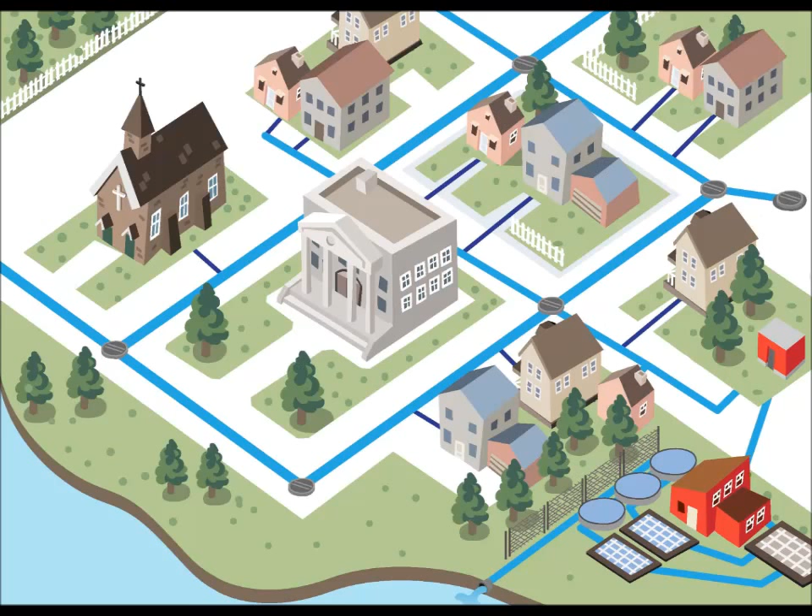If you're like most people, you aren't very familiar with how clean water comes into your home and how dirty water leaves. The Lewiston Auburn Water Pollution Control Authority, or LAWPCA, is a wastewater treatment plant for the cities of Lewiston and Auburn. Wastewater is collected from homes, schools, businesses, and industrial facilities and transported in a series of pipes, known as a collection system, to the wastewater treatment plant.

Additionally, septic haulers use trucks to carry waste from septic tanks in surrounding communities. At LAWPCA, harmful microorganisms and other kinds of pollution are removed from the wastewater so that it can be discharged safely into the Androscoggin River.

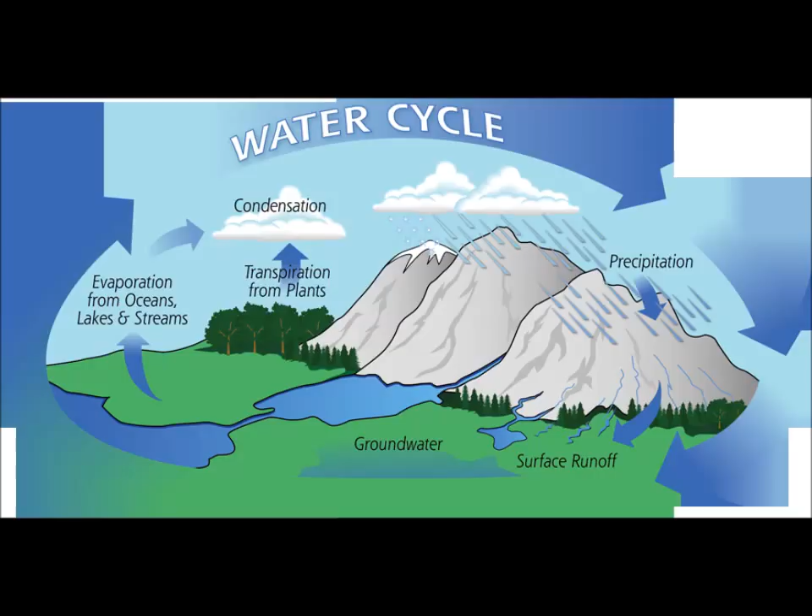Did you know that there is no such thing as new water? That's right. All of the water on Earth is the same water that has been here since the beginning of time. Earth's water is always in movement, and the natural water cycle describes the continuous movement of water on, above, and below the surface of the Earth. Water is always changing states between liquid, vapor, and ice.

The importance of how we care for and treat the water of planet Earth takes on a greater significance when we think of the saying, "We all live downstream." Another way of looking at it is the water that goes down your sewer pipe today is the water you will drink tomorrow. Of course, the water cycle is nature's way of cleaning used water over time so that it is good, clean, and drinkable.

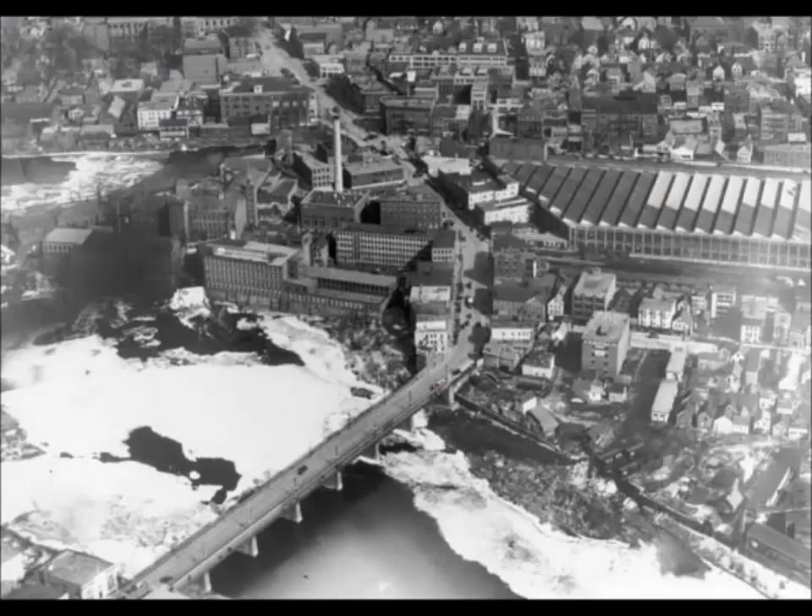How did it come to pass that the Androscoggin River was once one of the top 10 most polluted rivers in North America? The answer lies more in quantity than anything else. The waste from a few people is as natural to the river as is the waste from a bear or a deer. In small quantities, a large river such as the Androscoggin is well equipped to deal with waste through normal, natural processes such as aeration provided by waterfalls and rapids, settling of solids in deep pockets and pools, and biological removal through native bacteria, larvae, fish, and aquatic plants.

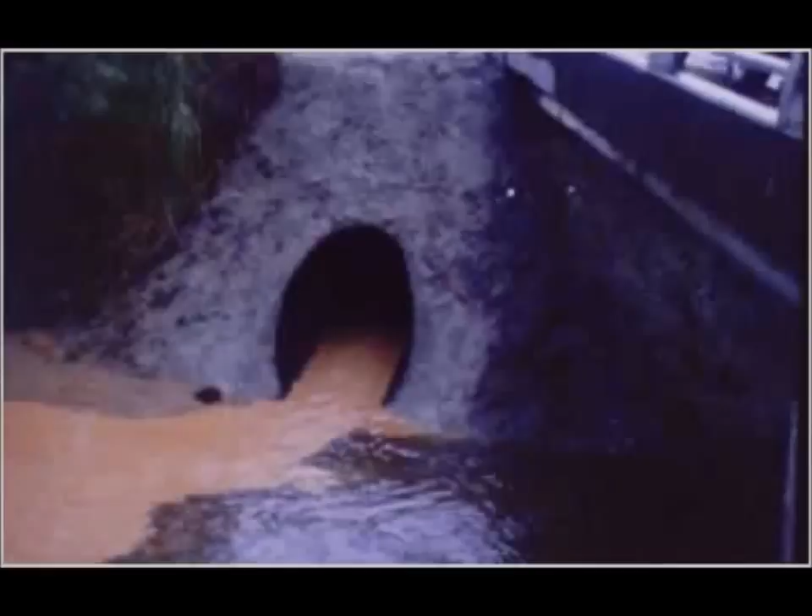The problems start when humans discharge too much waste from homes, mills, schools, and even runoff from parking lots. In short, the volume and strength of the waste generated from so many people living along the Androscoggin River got to the point where the natural processes used by nature became overwhelmed, and a polluted, foul-smelling river became the result.

Even before Maine's own Senator, Edmund Muskie, proposed the landmark legislation that became the Clean Water Act of 1972, Lewiston and Auburn came together to create LAWPCA. By building one wastewater treatment plant instead of two separate ones, the Twin Cities saved millions of dollars and embarked upon a cooperative approach to serving the people of Androscoggin County and cleaning up a truly magnificent river.

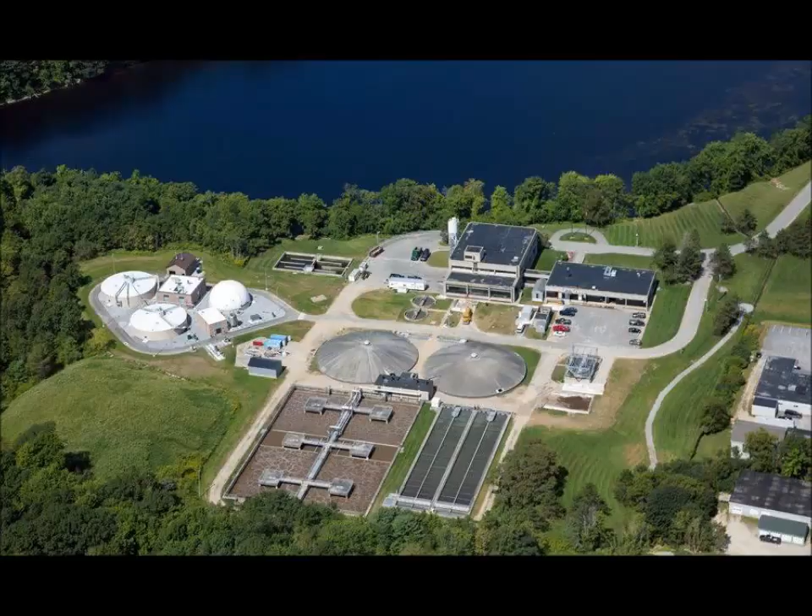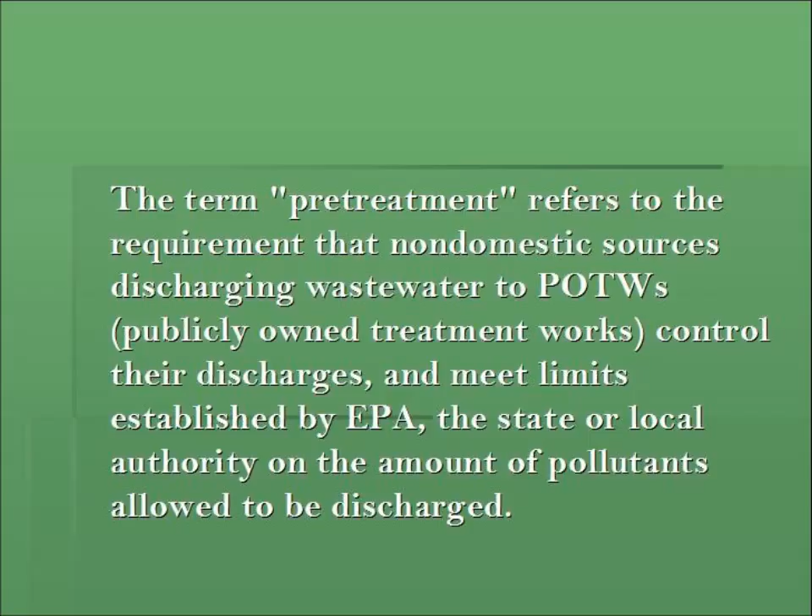Like most other city and town treatment plants that are funded by grants and loans established in the Clean Water Act, LAWPCA was mainly designed to treat domestic sewage only. However, the treatment plant also receives and treats wastewater from industrial, non-domestic users. As partners in the National Pretreatment Program, LAWPCA's responsibilities include finding and controlling discharges from all industrial users in Lewiston or Auburn that might cause problems in collection or treatment, or who are regulated by the federal government as categorical dischargers.

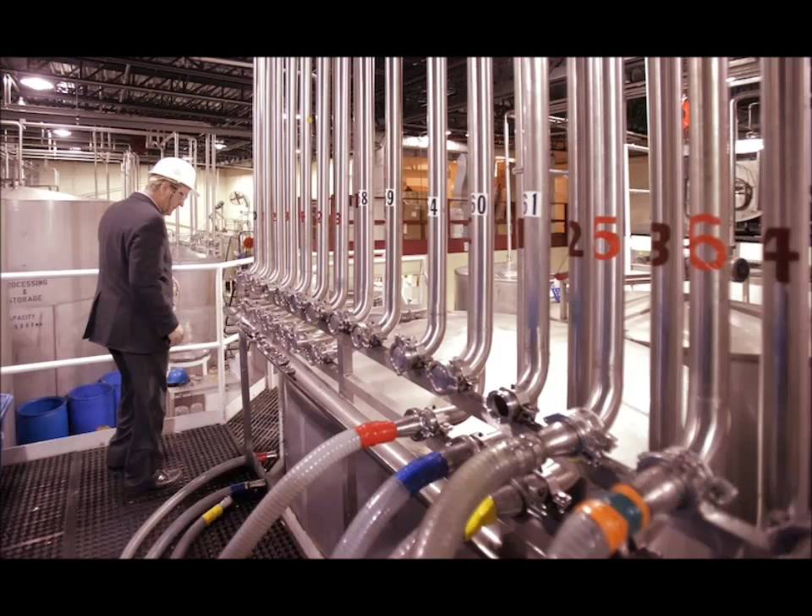To do this, a permit process was developed to assign rules, regulations, and local limits on all pollutants to protect our sewer workers, keep sewers from overflowing, protect the biological treatment processes, ensure the safety and quality of our compost and other biosolids, and help keep the Androscoggin River a safe place to fish and swim.

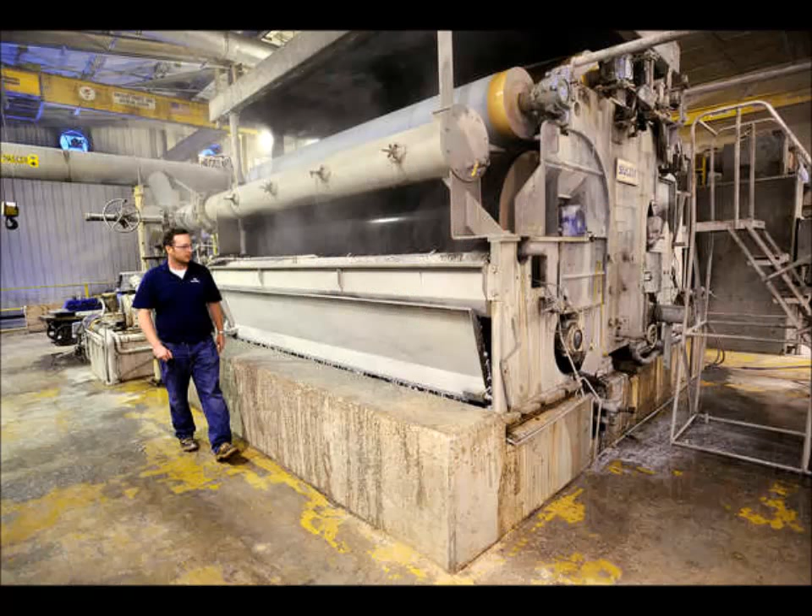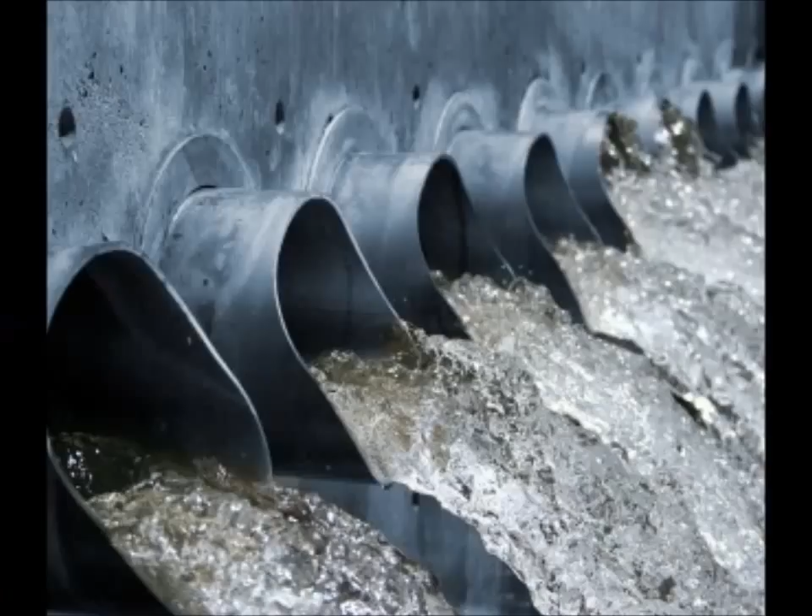Permitted industrial users are inspected annually and samples of their wastewater collected and tested to make sure they are following the discharge rules and complying with local limits and any federal categorical limits on pollutants. Industrial users with permits must also regularly sample their own wastewater to make sure they are meeting limits, and they must send reports on their compliance status to LAWPCA's pretreatment coordinator at least twice per year.

LAWPCA has been in operation since 1974 as a wastewater treatment plant. It services over 35,000 domestic users, 23 significant industrial users, and 26 surrounding communities from which septic and holding waste is received. The treatment plant is designed to handle an average flow of 14.2 million gallons per day, but by permit has to treat a maximum of 32 million gallons per day before bypassing.

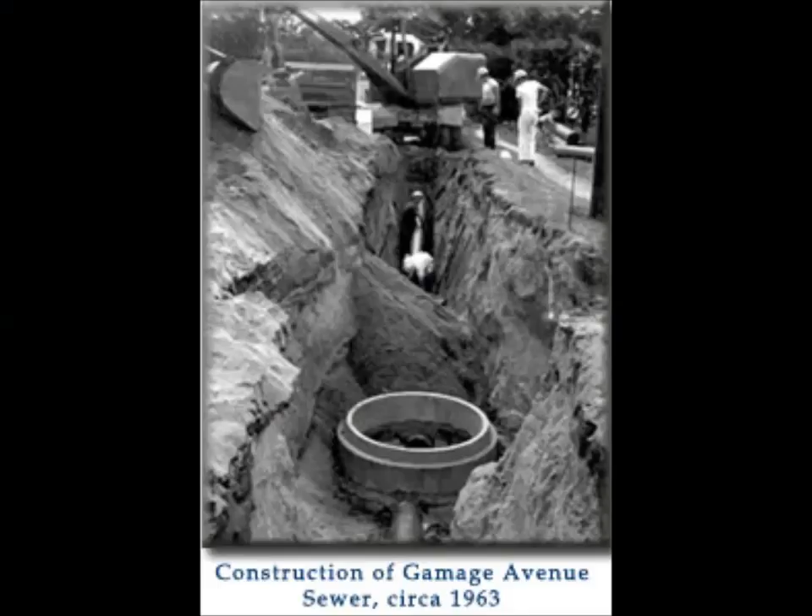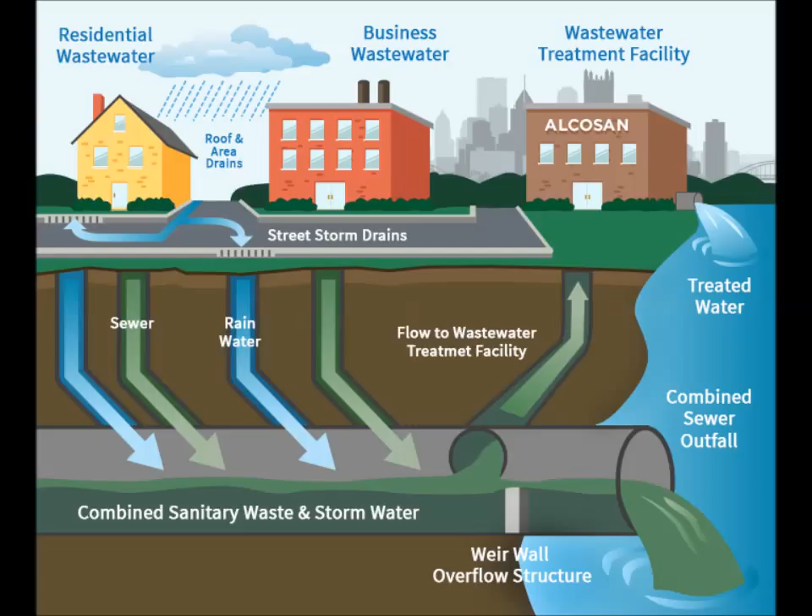Originally, the sewers in Lewiston and Auburn carried large quantities of stormwater to the treatment plant in combined sewers. After all, the pipes that had been placed beneath the two cities originally went straight to the river, and there was no need for separate sanitary sewers and stormwater sewers. Because the treatment plant can only process about 32 million gallons per day as a peak flow rate, diluted sewage has been bypassed to the river without treatment. These combined sewer overflows, or CSOs, have been greatly reduced as a result of the millions of dollars that have been spent by both cities to install new separate sewers.

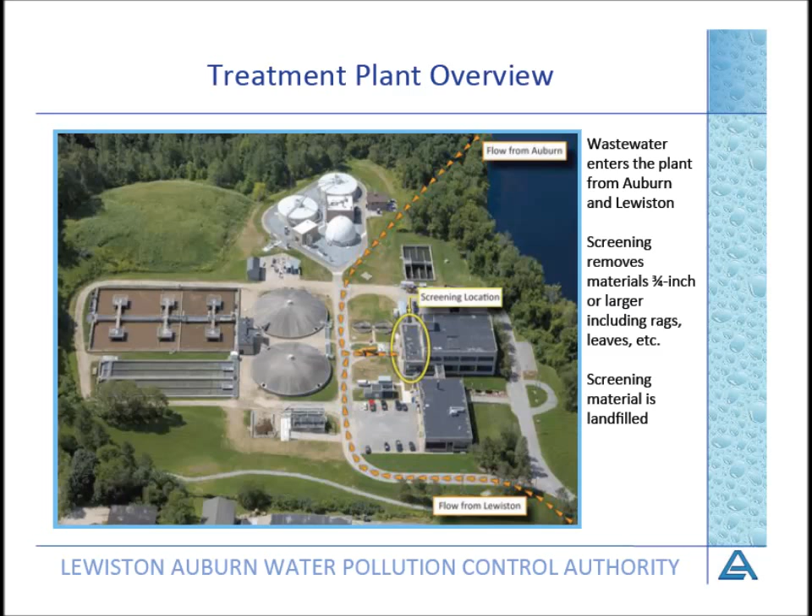Once wastewater arrives at LAWPCA, preliminary treatment involves the removal of large materials such as rocks, twigs, and various trash items. This material is removed by mechanical bar screens, washed, and then disposed of.

Baby wipes, rags, sanitary products, and other non-dispersible items frequently cause problems for pumps and screens. These problems are not only expensive to fix, but they can pose safety threats to the operators who must repair them. The only item that should ever be flushed is toilet paper. All other items should be disposed of in the trash.

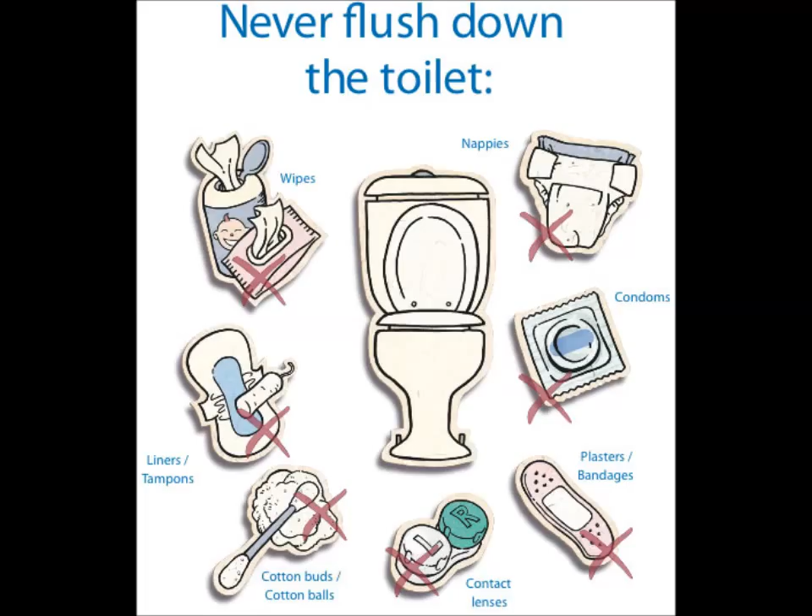After large debris is screened, the water moves on to grit removal. Here, sand and other heavy debris is removed and landfilled. Unfortunately, the grit cannot be reclaimed due to it containing dangerous trash items such as needles and razor blades.

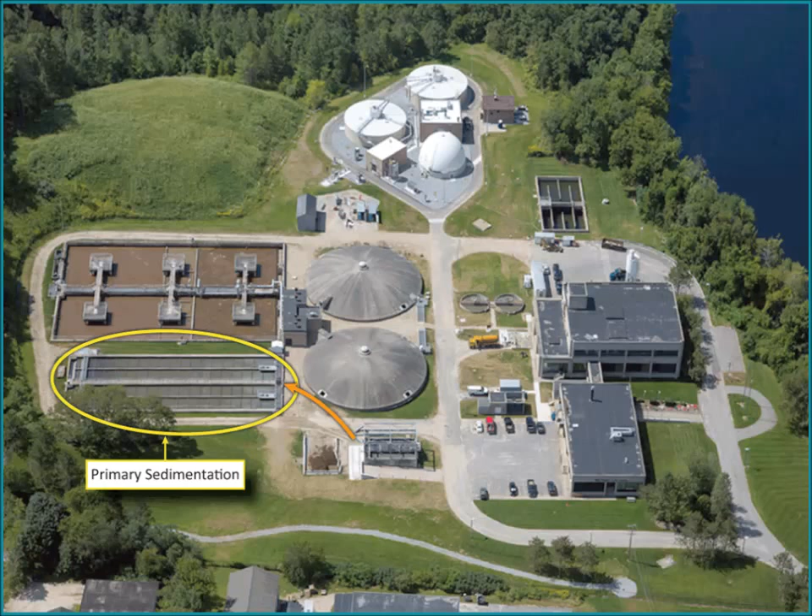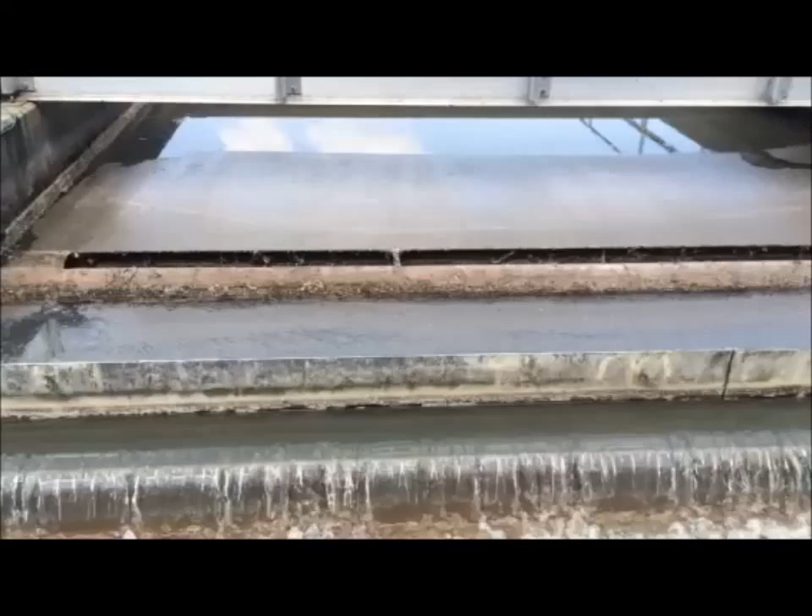After grit removal, the wastewater goes through primary treatment. Here, heavy solids settle to the bottom as primary sludge, and some fats, oils, and greases float to the top. The settled primary solids are pumped to the primary thickeners for later solids processing, and the floating fats, oils, and greases are skimmed off the top and transported to landfill.

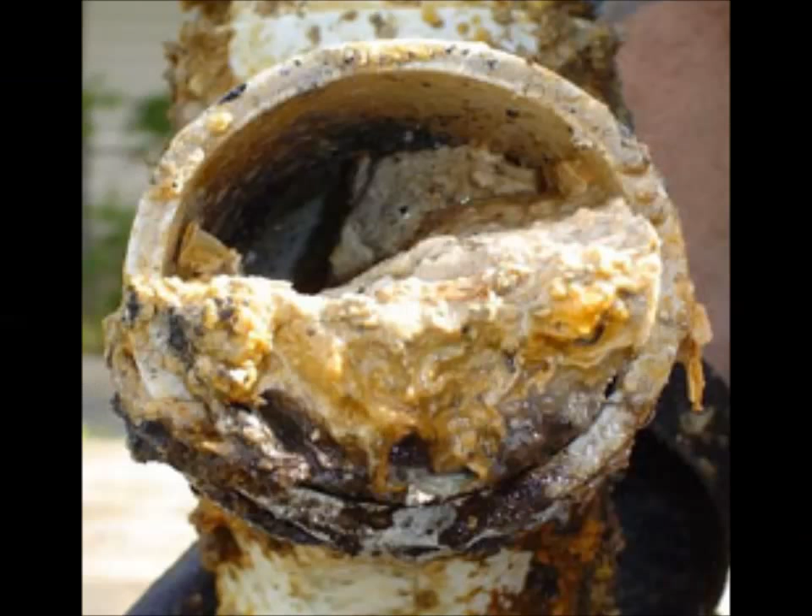Some grease from soaps and dishwashing is okay, but large amounts of heavy grease and oil can cause sewers to back up into houses or even back up on or under the street. You can be a great help by disposing of cooking grease in the trash instead of putting it down the drain.

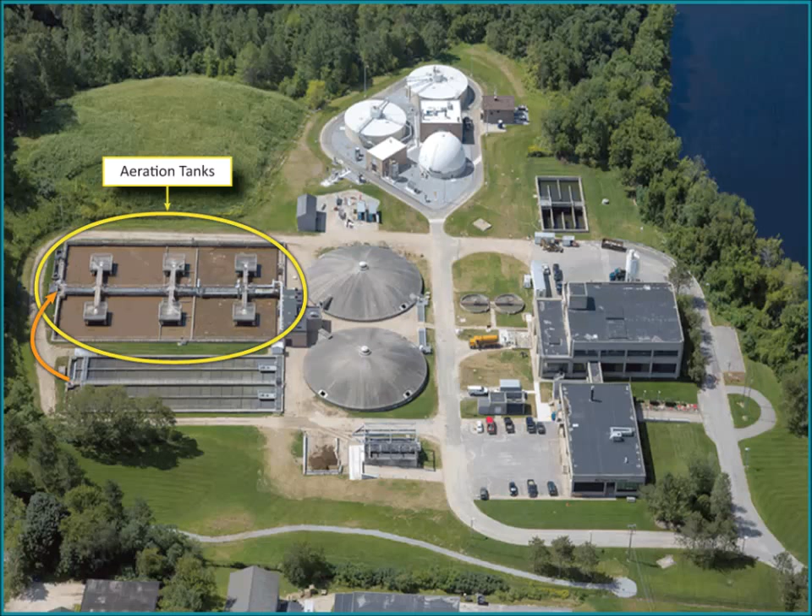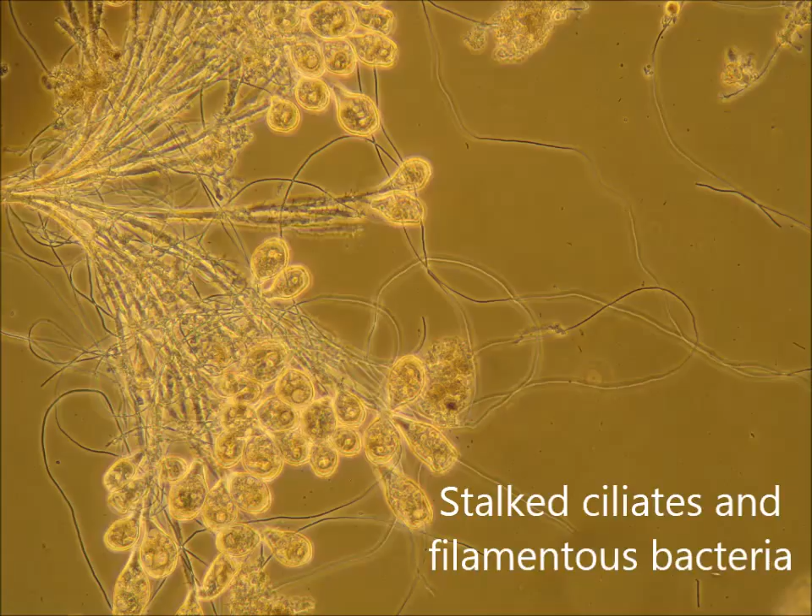Up to this point, the treatment process has been mainly physical separation. During secondary treatment, the water travels into the aeration basins to be treated biologically with naturally occurring bacteria and microorganisms that use the organic waste as a food source and break it down into carbon dioxide, water, and inorganic compounds.

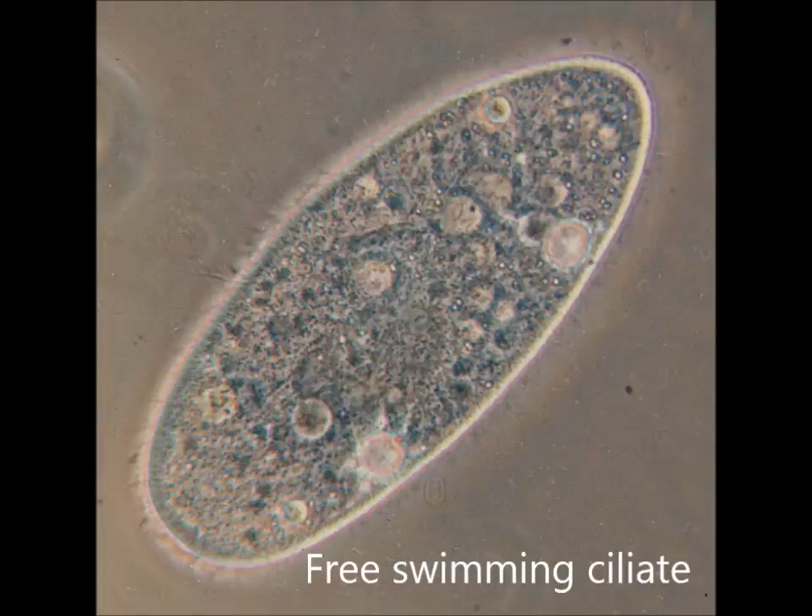The microorganisms reproduce and also die, so they are monitored and some are removed from the system to ensure there is always a healthy and thriving population to treat the waste. This solid waste product removed is called activated sludge.

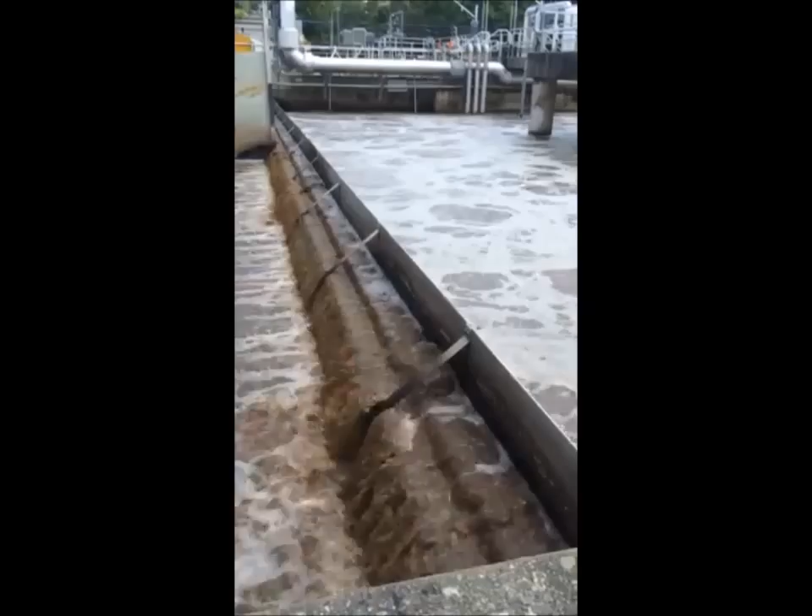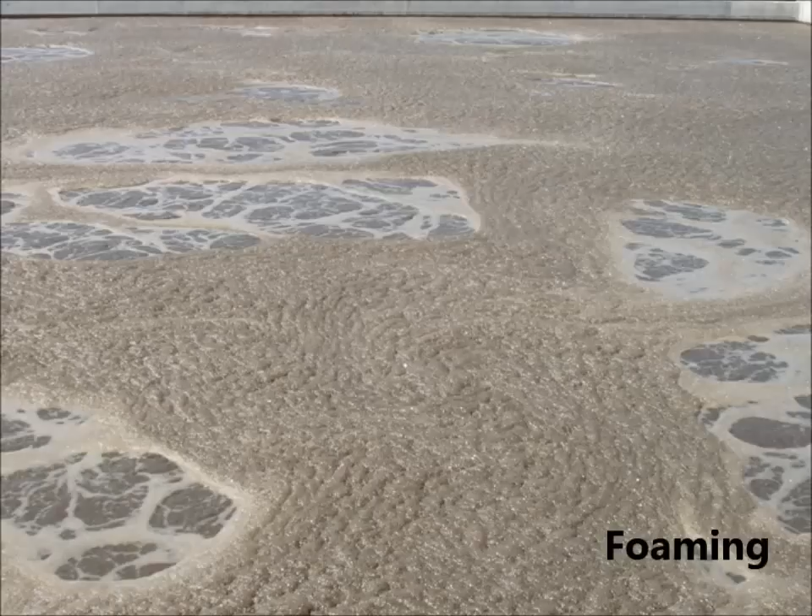In the aeration basin, desired bacteria are selected for by adding oxygen and by avoiding conditions that favor the growth of undesired organisms. These conditions include low nutrients, typically phosphorus, septic or low oxygen conditions, and an unbalanced food-to-mass ratio, with food being what is coming into the basins and mass being the amount of organisms present and ready to metabolize the food. The goal is to prevent too many undesired microorganisms from growing because they can negatively affect treatment.

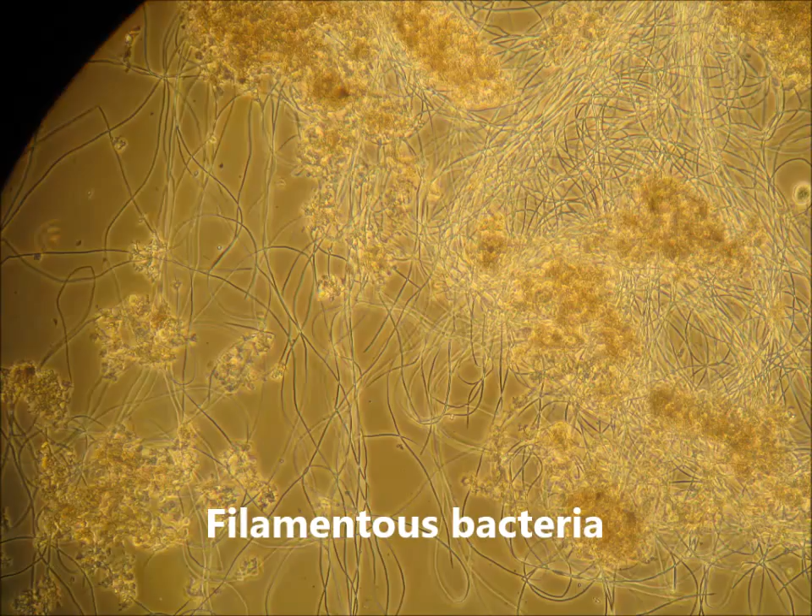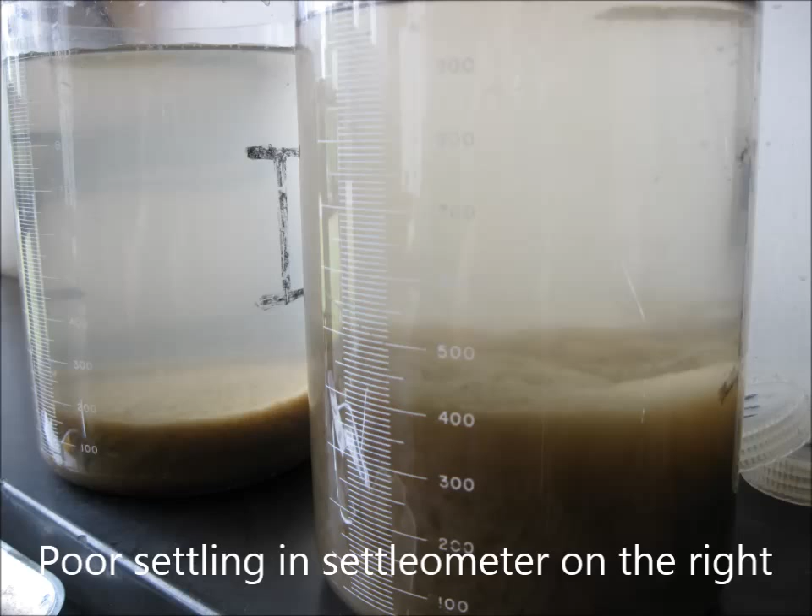For example, filamentous bacteria can cause significant problems during solid settling, which is the next step in the treatment process. In the secondary clarifiers, there is no aeration to keep the solids in suspension. In this still environment, the activated sludge separates from the water by settling to the bottom.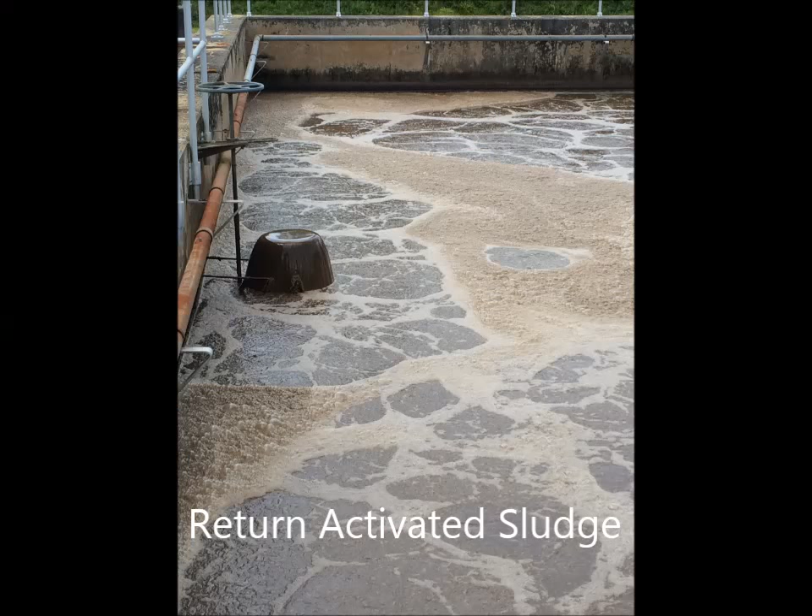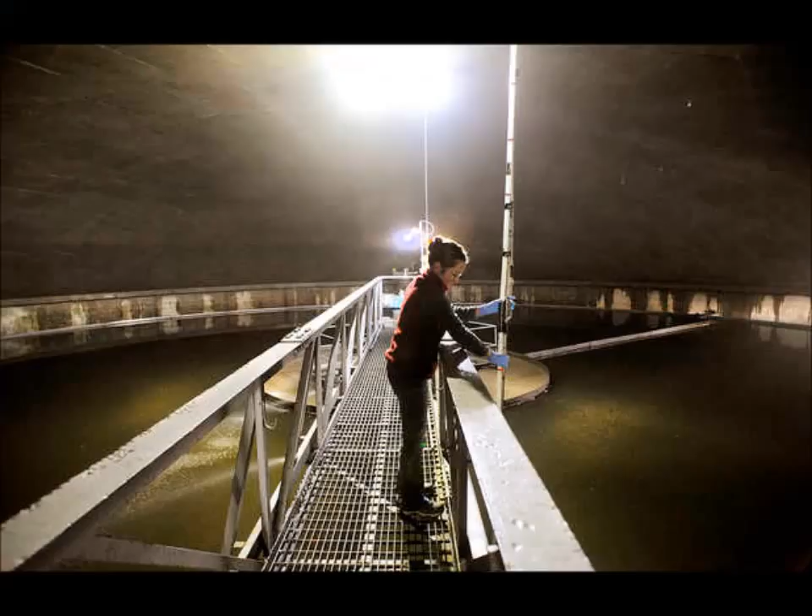Some of the activated sludge is removed and stored for later solids handling, but some is returned back to the aeration basin because the microorganisms are still viable and able to keep treating the incoming waste. During their time in the clarifiers, the microorganisms do not have any new food, so when they are returned to the aeration basin, they are essentially starving and very ready to keep metabolizing the incoming waste.

When the solids settle in the clarifier, the clean water above flows out over weirs and continues its journey to the river. At this point, the water is now called clarifier effluent, and it is much cleaner than when it came into the treatment process.

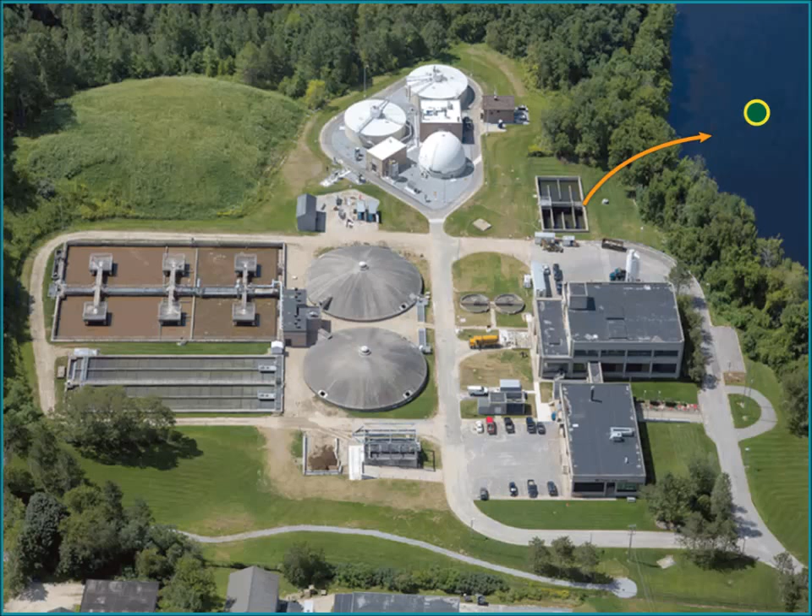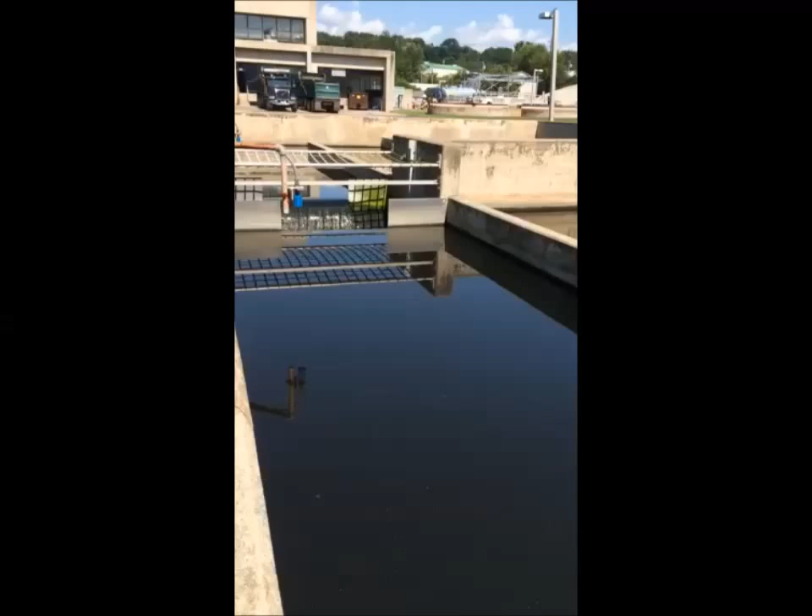The water has one more stop to make before it goes into the river. In the final basin, it undergoes disinfection from mid-May to the end of September. Disinfection is achieved by applying sodium hypochlorite, which is essentially a strong liquid bleach. Since bleach is toxic, the water is dechlorinated with sodium bisulfite before being discharged into the Androscoggin River.

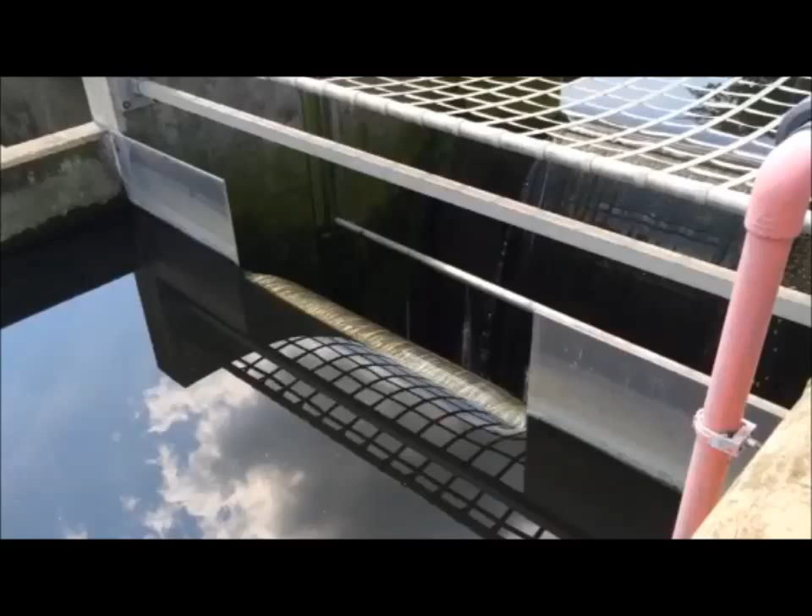The reason for seasonal chlorination is: one, biological activity slows down at colder temperatures, making any remaining microorganisms not as able to survive and reproduce. And two, there's much less recreational use of the river during colder months. People are not as likely to be boating or fishing.

The water, now called final effluent, leaves the treatment plant and enters the Androscoggin River. At minimum, 85% of the total suspended solids and oxygen demand have been removed. Now we'll visit the laboratory to learn about the testing done at LAPCA.

The laboratory staff is responsible for conducting many tests to ensure LAPCA is providing quality treatment. The final effluent being discharged to the river must meet compliance standards. The Maine Department of Environmental Protection sets limits for certain parameters and assigns those limits as part of a Maine Pollutant Discharge Elimination System, or MEPDES permit. Let's take a look at some of the testing done in the lab.

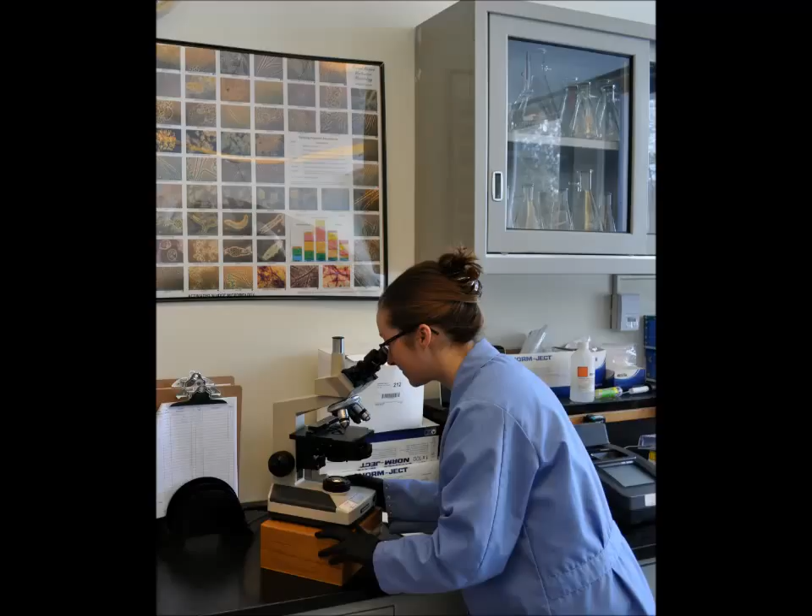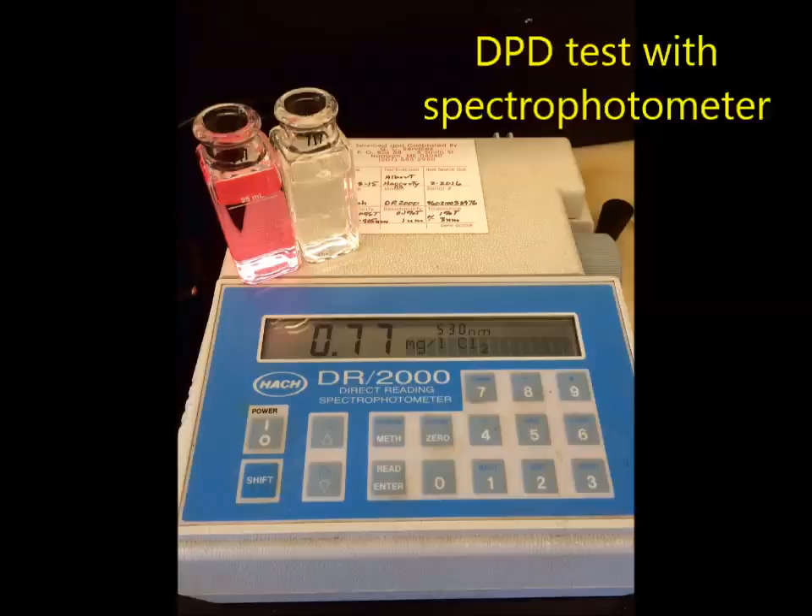Total residual chlorine testing is done to ensure that enough chlorine is being applied to achieve adequate disinfection, and also to confirm that proper dechlorination is happening and high levels of chlorine are not being discharged into the river. The typical chlorine level for disinfection might be 1 milligram per liter in the final basin, but the permit limit for what can be discharged is 0.24 milligrams per liter.

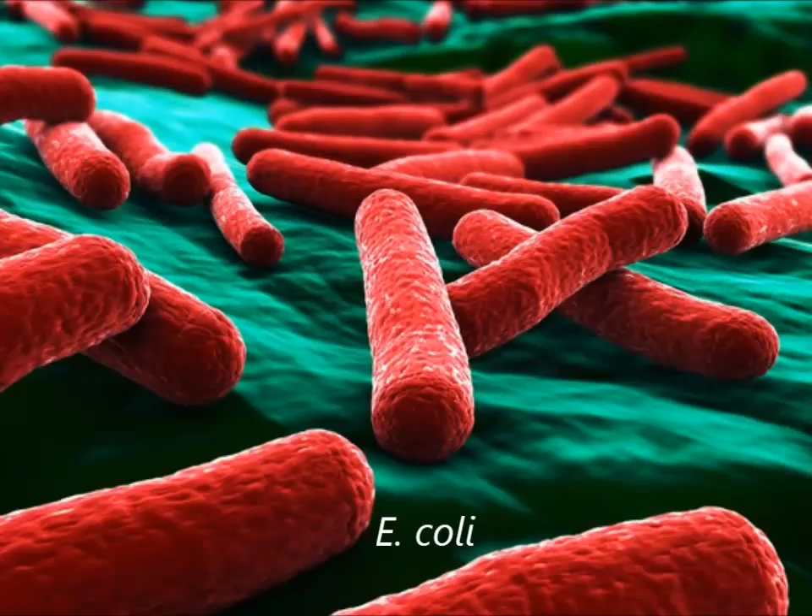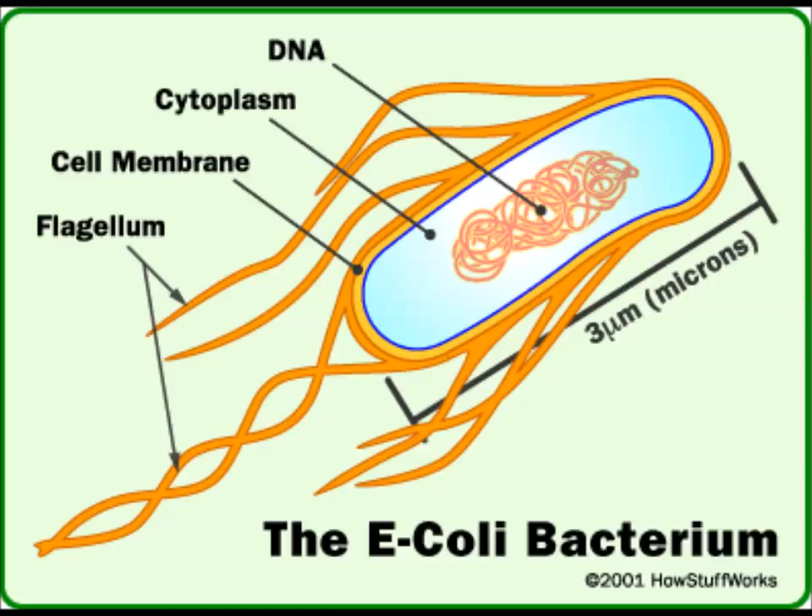E. coli is a member of the fecal coliform group of bacteria, meaning that it is found in the intestinal tracts of warm-blooded animals. While many strains are generally harmless, they do live under the same conditions that human pathogens live. Since it is not practical to test for every possible pathogen, E. coli is used because it is an easily detectable indicator organism.

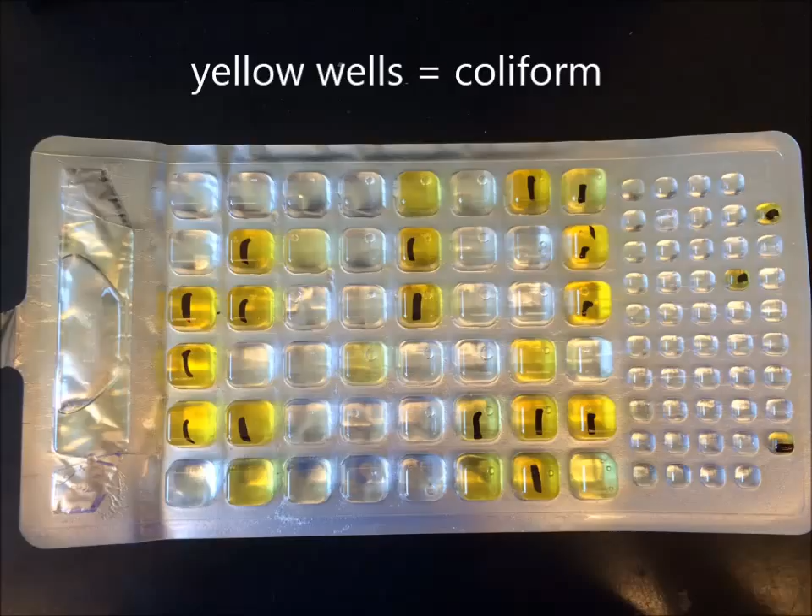E. coli has been shown to be a better predictor of the potential for impacts to human health from exposure to wastewater effluent and surface waters which contain wastewater effluent. The assumption is that if the indicator organism is killed, other possible pathogens have also been killed during effluent disinfection. LAWPCA's E. coli permit limit is 949 colony-forming units, or CFUs, per 100 milliliters of effluent, but the concentration being discharged is typically much lower than that.

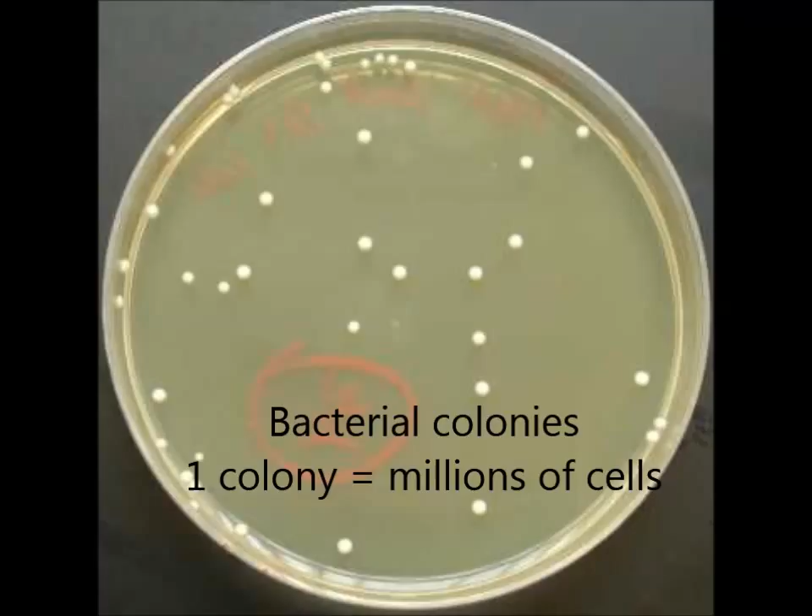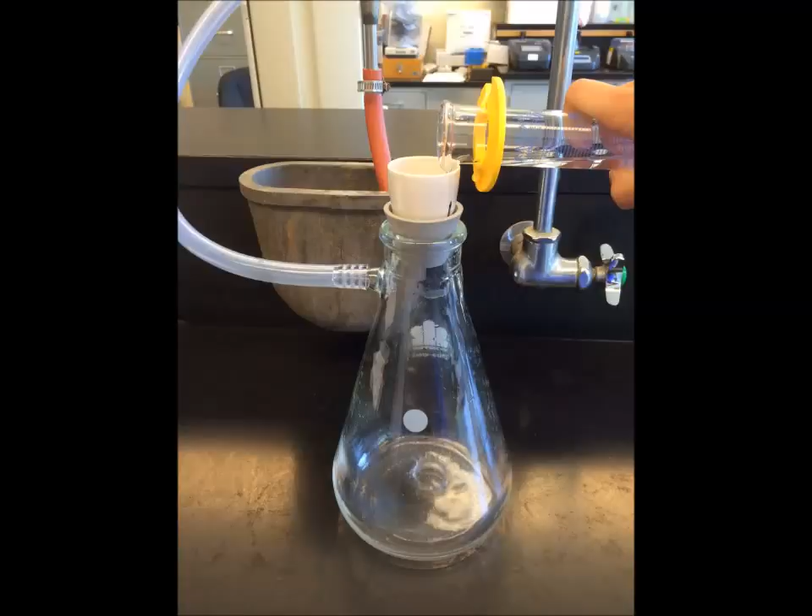Another important test is called total suspended solids, or TSS, which is a measure of the non-filterable solids in water. Water is passed through a filter, then the amount trapped is weighed and a solids concentration is calculated. TSS can include a wide variety of material, such as dirt, decaying plant and animal matter, industrial wastes, and sewage. High concentrations of suspended solids can cause many problems for river health and aquatic life, so reducing them as much as possible is very important.

From the time wastewater enters the treatment plant to the time it leaves, the level of solids must have been reduced by at least 85%. The numerical permit limit is 50 milligrams per liter daily maximum. The solids entering from Lewiston and Auburn can average 200 to 500 milligrams per liter. This is reduced to roughly 100 to 150 milligrams per liter after primary treatment, and typically less than 20 milligrams per liter will be discharged into the river. These values can change during atypical situations, such as a major rain event, when the treatment plant can become hydraulically overloaded.

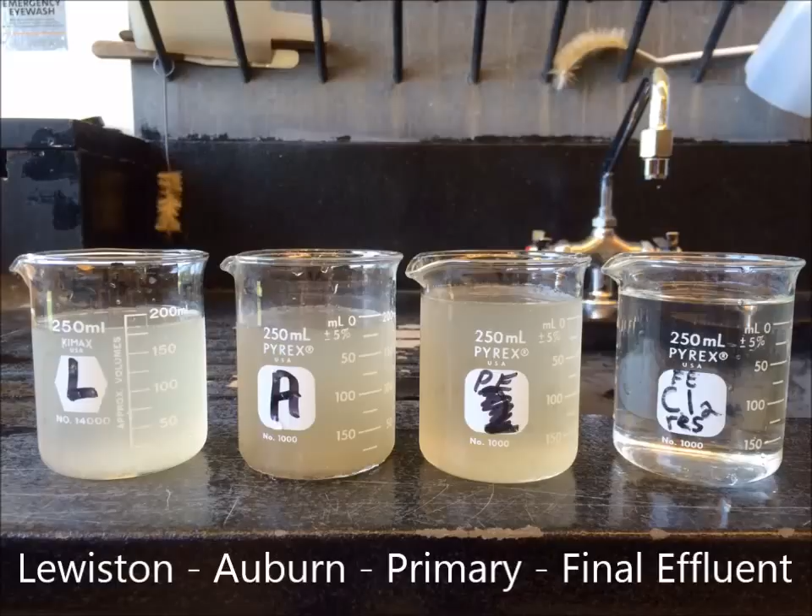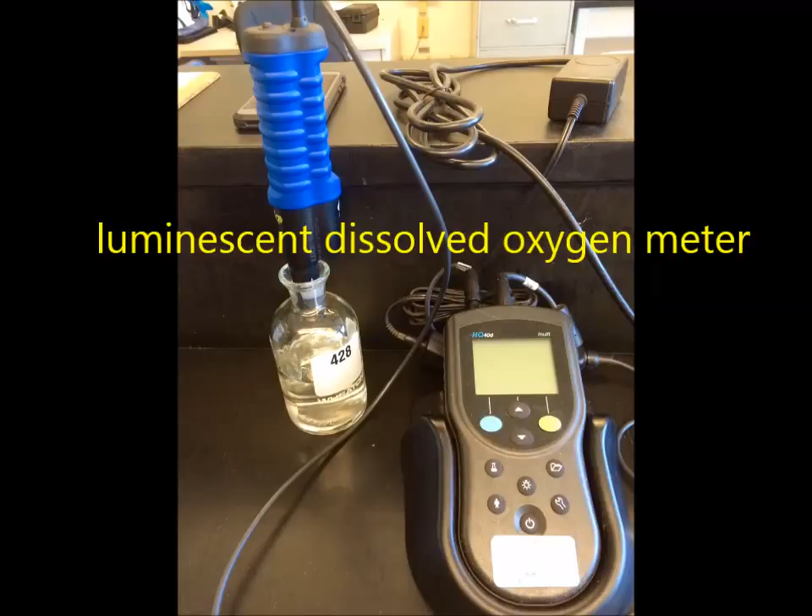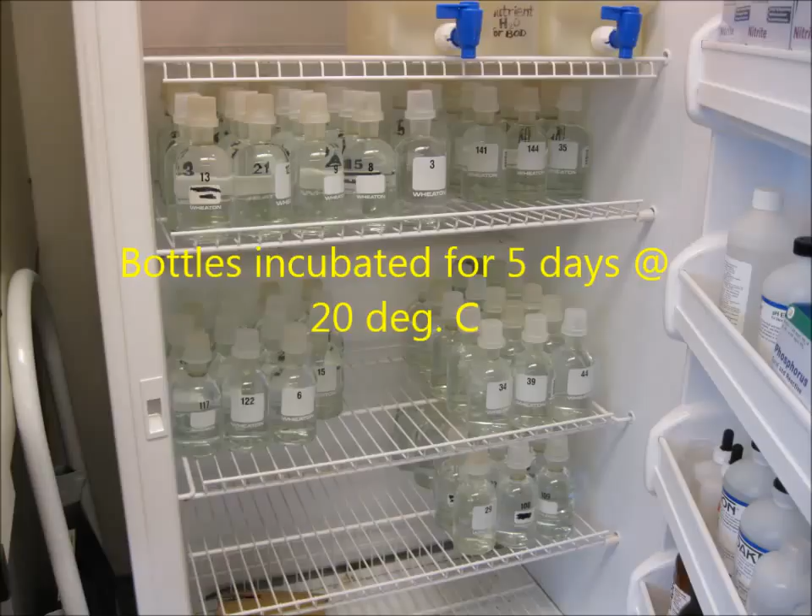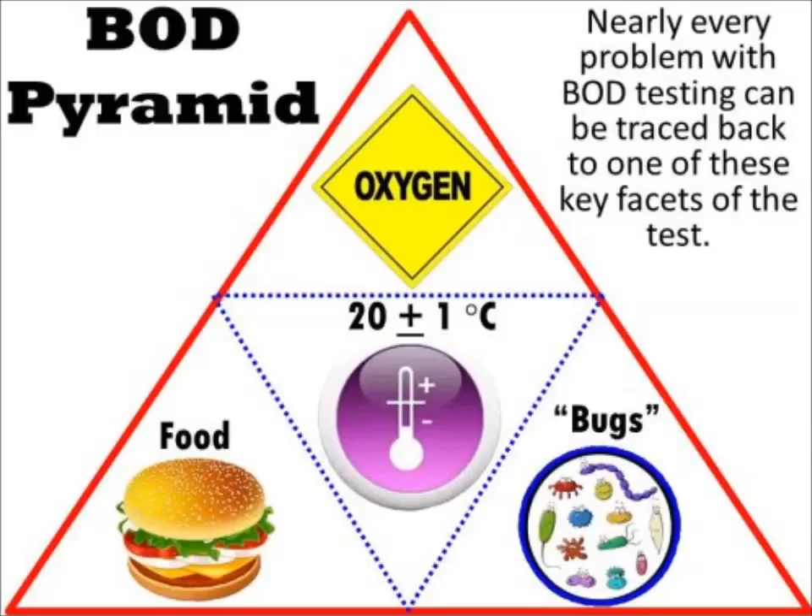Biochemical oxygen demand, or BOD, is the measure of the amount of dissolved oxygen that must be present in water in order for microorganisms to decompose the organic matter present in the water. It can be used as a measure of the degree of pollution in wastewater because the higher the oxygen demand, the greater impact the effluent might have on the receiving water. Similar to total suspended solids, the oxygen demand must be reduced by a minimum of 85% from the time the water enters the treatment plant to the time it is discharged to the river. The numerical permit limit for this is also 50 milligrams per liter daily maximum, though LAWPCA routinely discharges 20 milligrams per liter or less of oxygen demand to the river.

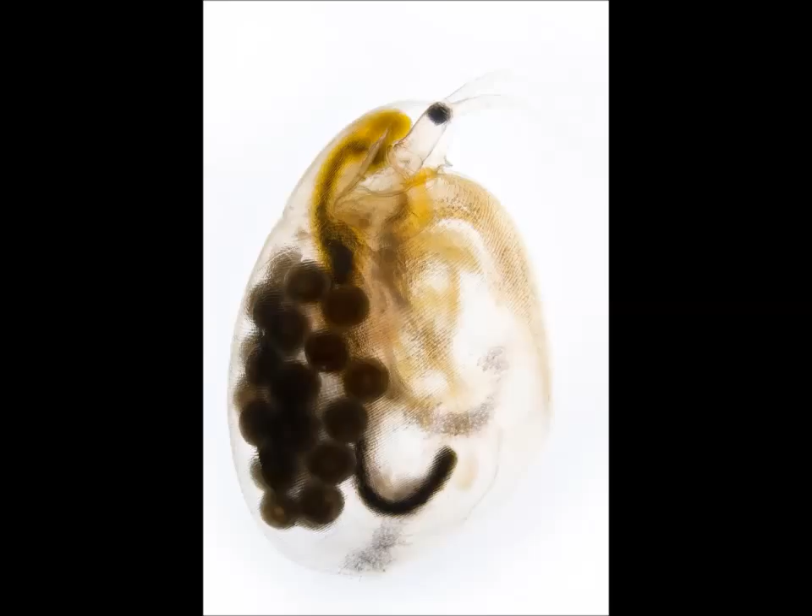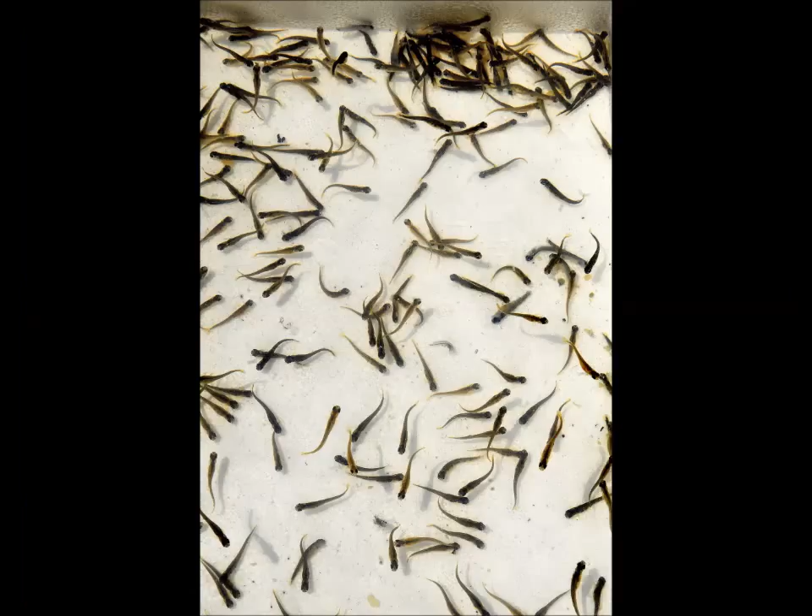The test that truly shows how clean the final effluent is called the whole effluent toxicity test. In this test, various concentrations of effluent in river water are used to determine the acute and chronic effects on living organisms. The survivability and reproducibility of water fleas and the survivability and weight gain of fathead minnows is analyzed. Results have actually shown that the organisms can fare better in 100% effluent than in 100% river water, indicating that the water being discharged from LAWPCA is actually cleaner than the water existing in the river.

The lab also does daily process control testing to monitor the water treatment. These tests are not required, but they help make sure everything is operating properly and signal when adjustments need to be made.

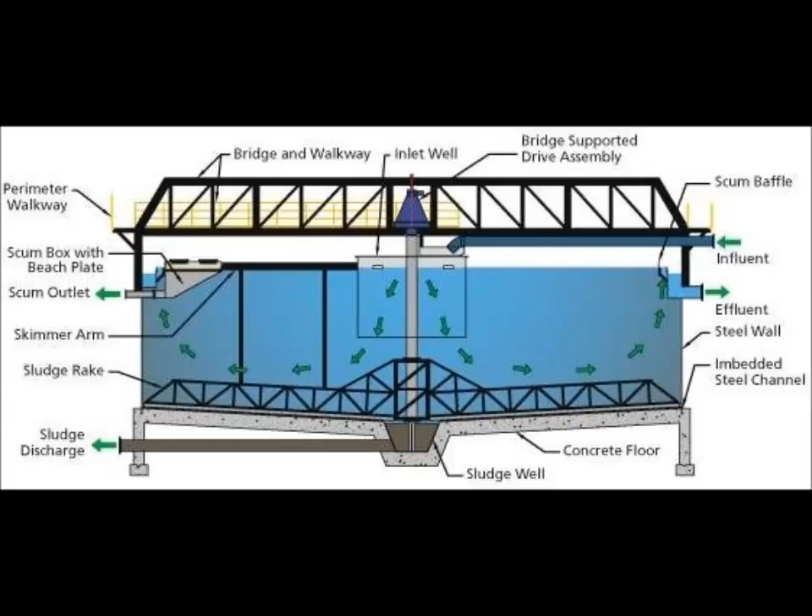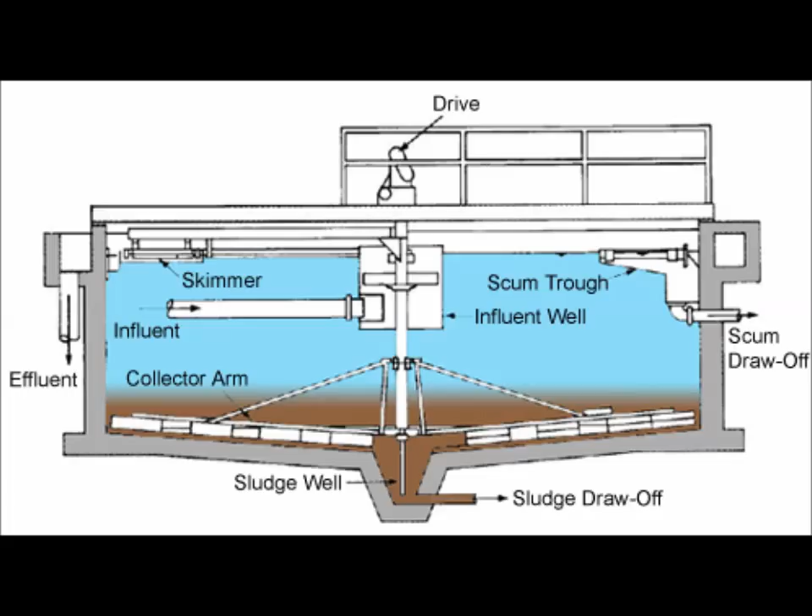Now that you know where the water goes, we have to go back and review how the solids are treated. If you remember, there is primary sludge that settles out in the primary clarifiers and activated sludge that settles out in the secondary clarifiers. Primary gravity thickeners allow primary sludge to settle and compact. The thickened sludge is withdrawn from the bottom of the tank and is fed to the anaerobic digesters. The water flows over weirs and is returned to the beginning of the treatment plant just before the bar screens.

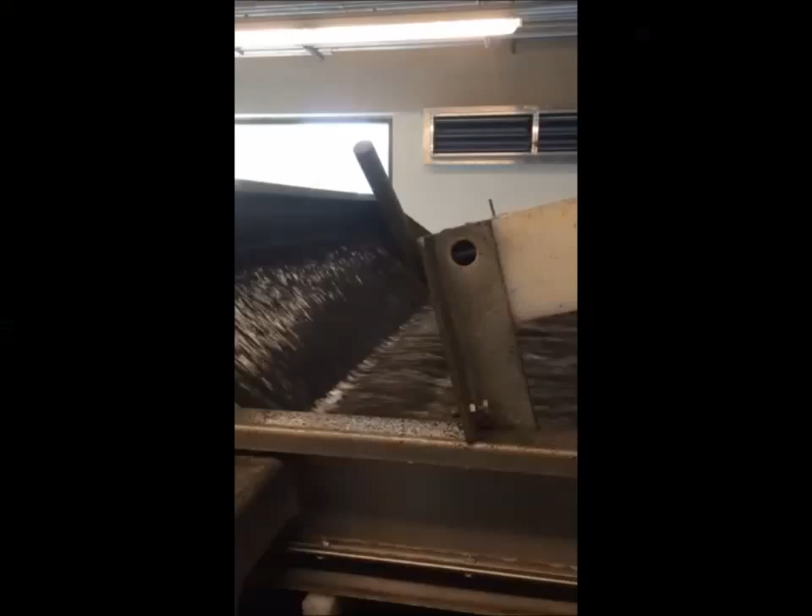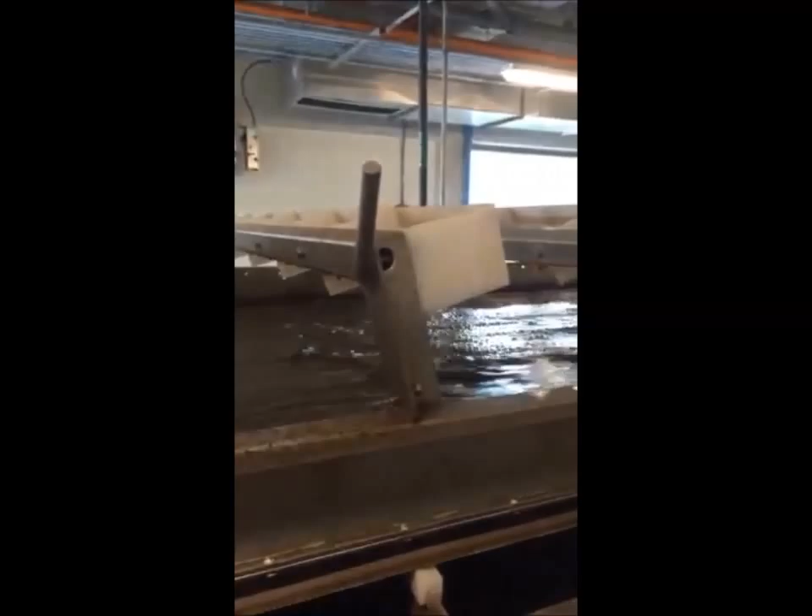Gravity belt thickeners, or GBTs, are machines that are used to pre-thicken activated sludge, or remove water content, before introducing the sludge into the anaerobic digesters. The goal is to remove as much water as possible so that more degradable solids can be fed to the digesters. The process consists of mixing polymer into the activated sludge stream, thus allowing sludge to clump together and release water. The released water is drained through the belt of the machine and sent back to the beginning of the treatment plant. The now thickened sludge is transferred via progressive cavity pumps into holding tanks. It is from these storage tanks that the sludge is transferred into the digester. At the end of 2012, LAWPCA became the first wastewater treatment facility in the state of Maine to construct anaerobic digesters.

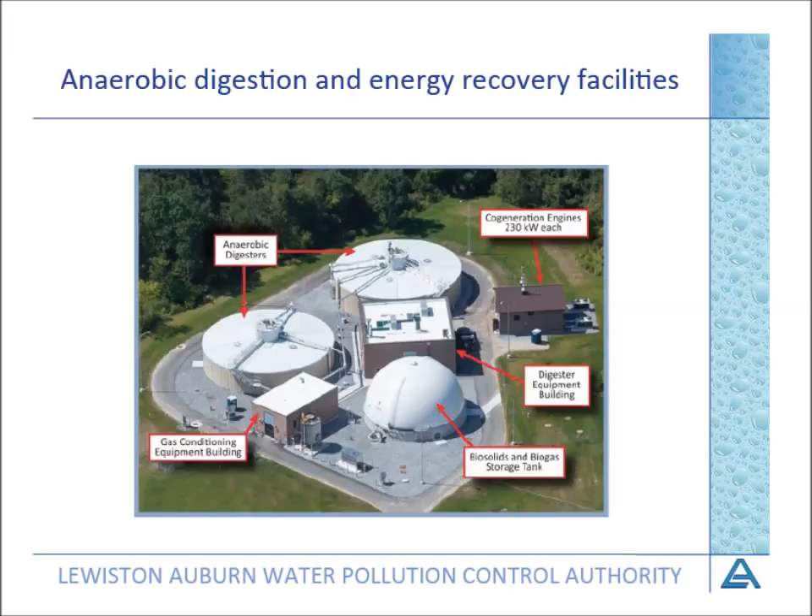This extra step in the treatment process was chosen because, one, it reduces the amount of solids that need to be dewatered and land applied or composted, and two, it creates a methane-rich biogas which can be converted to energy, providing significant financial savings. The digesters have a combined capacity of 1.38 million gallons. They are mesophilic, which means they are maintained at approximately 97 degrees Fahrenheit.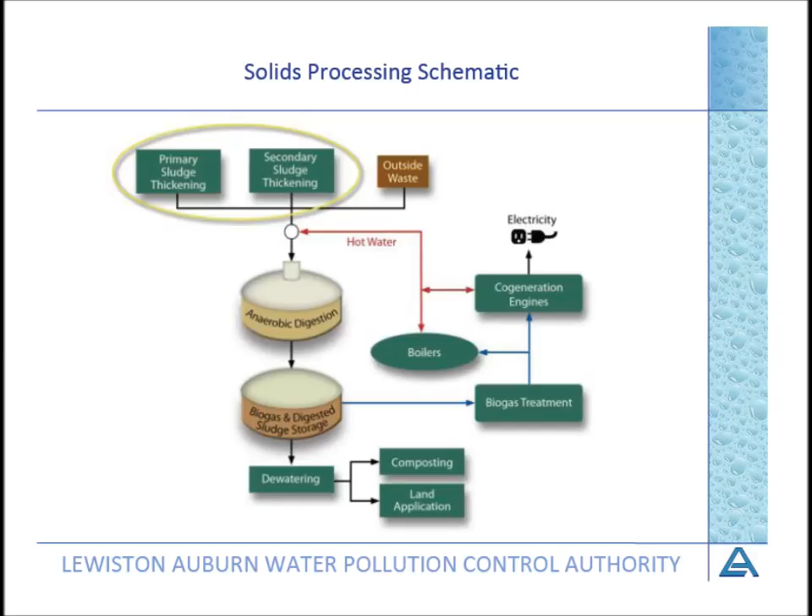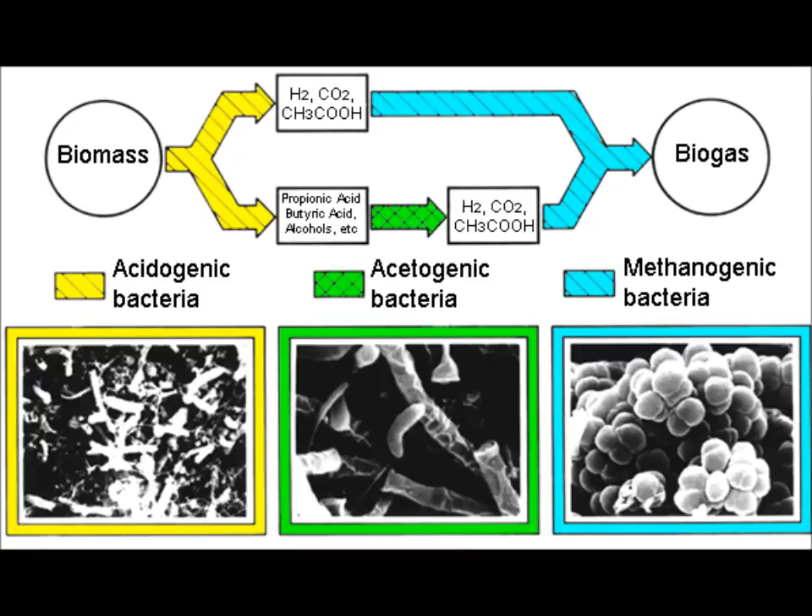The primary sludge and activated sludge from earlier in the treatment process are fed into the anaerobic digesters. High organic strength feedstocks, such as yogurt whey and food waste, are trucked in by various companies and are also fed to the digesters. Within the digesters, different groups of bacteria, called anaerobic bacteria, metabolize the sludges and feedstocks, creating a more stable solid waste product and biogas. Biogas and digested sludge are stored prior to subsequent processing. The gas storage capacity is 33,000 cubic feet, and the digested sludge storage capacity is 168,000 gallons.

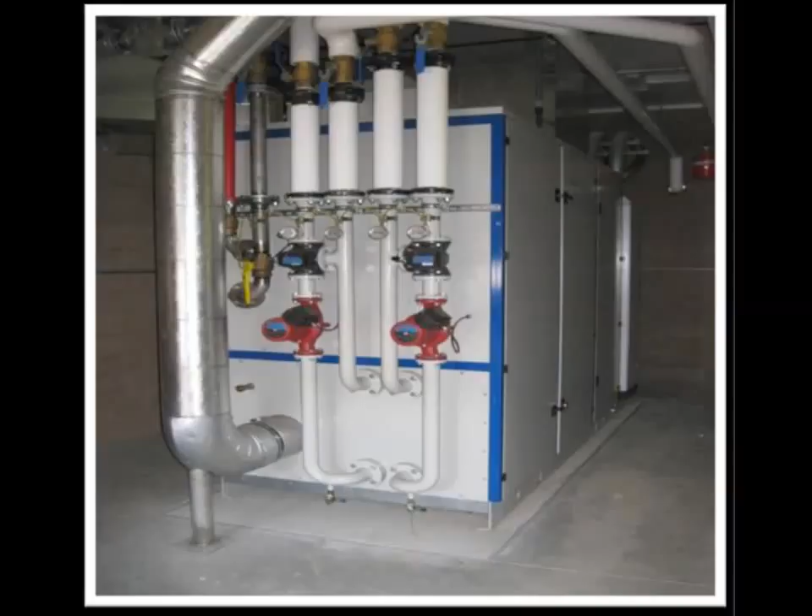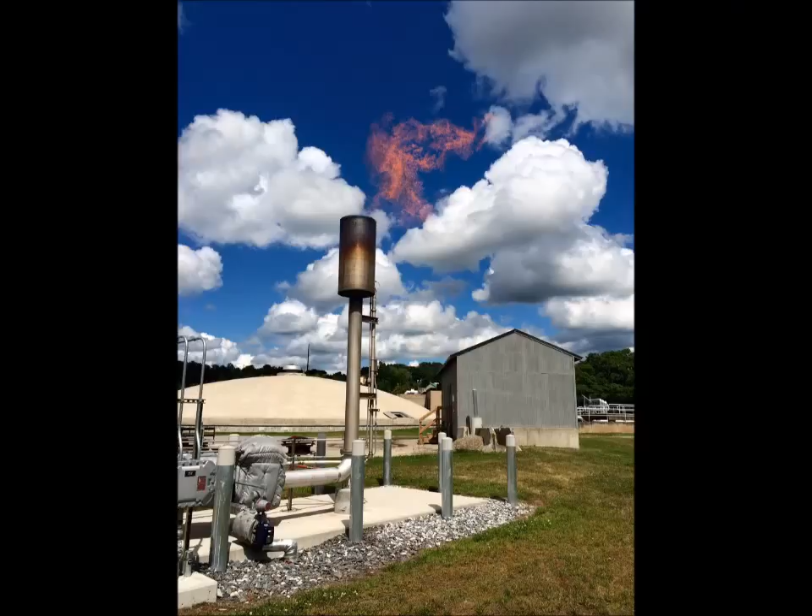Before the biogas can be used, it is treated by filtration through iron-impregnated wood chips to remove impurities such as moisture and hydrogen sulfide. The biogas is approximately 65% methane and is used as a fuel in engines to produce electricity, or is used in boilers to produce hot water. The hot water produced by the engine cooling jackets or boilers is used to keep the digesters at the correct temperature. Reciprocating engines were chosen over microturbines due to size, ability to handle somewhat dirtier gas, and maintenance needs. When the amount of gas produced exceeds the rate at which it can be used, plus the storage capacity available, it is flared off to the atmosphere.

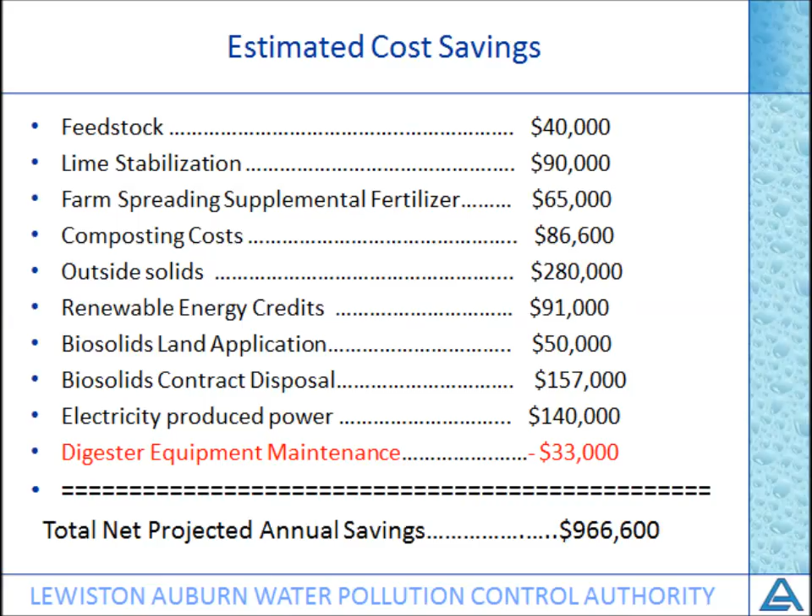From a financial standpoint, the anaerobic digestion upgrade has been a success. The total project cost was $15.5 million. Initial estimates predicted an annual savings of $600,000 per year, but recalculation has shown that the process is currently saving LAWPCA approximately $1 million per year.

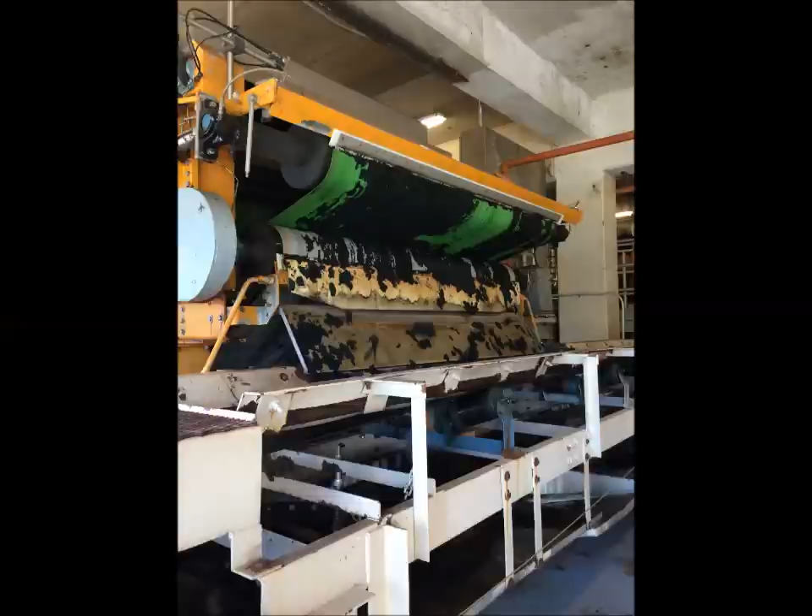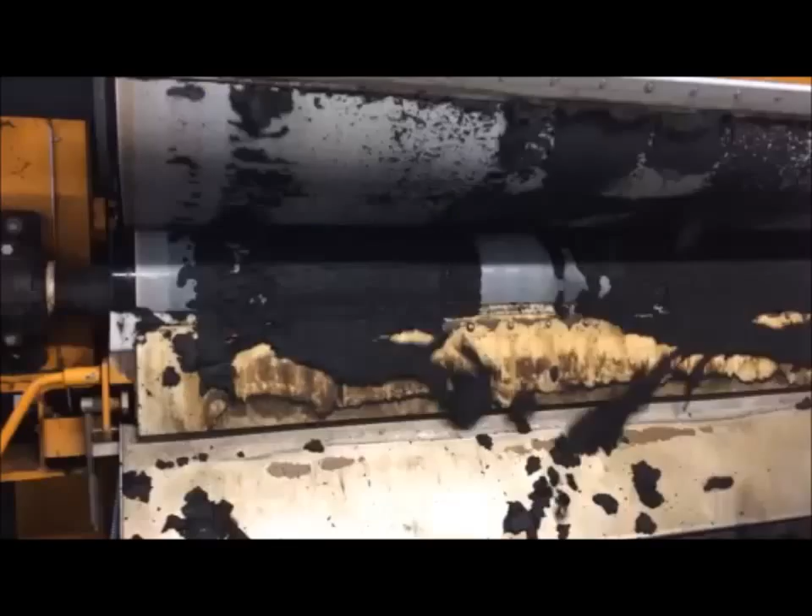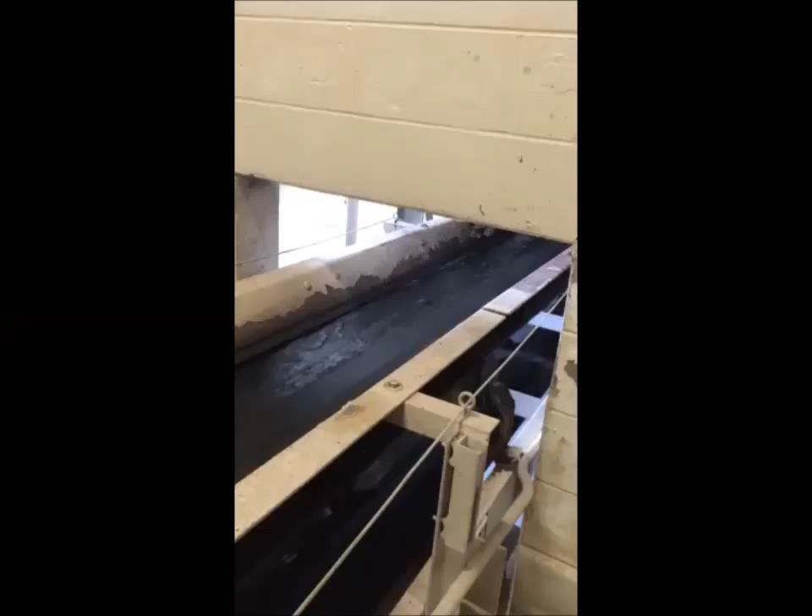Belt filter presses are the machines that are used to dewater solids that have been anaerobically digested. They use similar technology as gravity belt thickeners, but in addition to gravity draining, they remove water from the polymer-conditioned sludge by applying a progressive squeeze on the sludge between two belts, which results in a much drier sludge compared to what you would get from the gravity belt thickeners. On average, LAWPCA can accomplish approximately 13% total solids from the digested sludge. This is fair, but not as high as what newer technology can provide. In late 2015, LAWPCA will undergo an upgrade to screw auger presses, which are expected to increase solids dryness. Once pressed, the solids are transferred by conveyor belt into a truck to be delivered to local farms or transported to the compost facility.

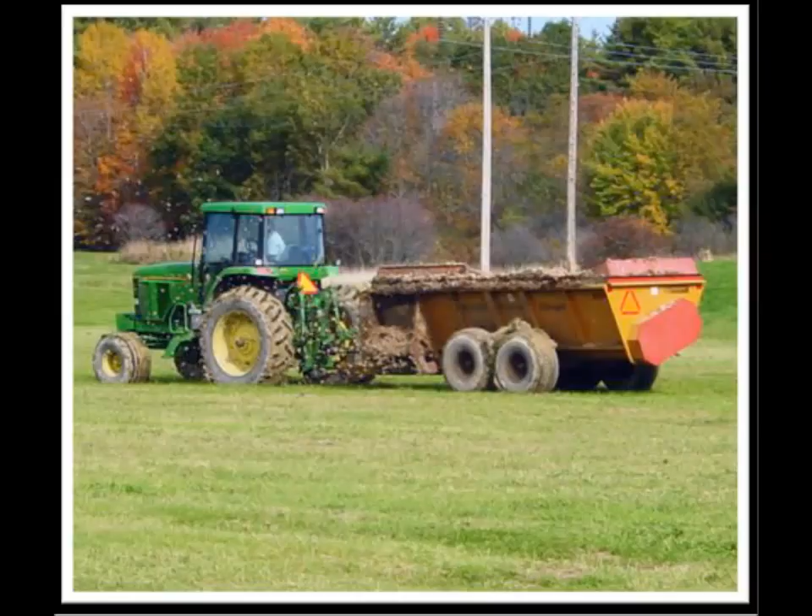After being pressed, the solids are referred to as biosolids. The biosolids are either transported to farms to be directly land applied as Class B biosolids for growing hay and corn for cattle, or they are brought to the compost facility for further processing into Class A biosolids. The compost facility has been in operation since 1993. Biosolids from LAWPCA and sometimes other wastewater treatment plants are trucked in. Here, the solids go from a mud pie consistency that was seen on the belt filter presses to a more soil-like form that is used for flower and vegetable gardens, landscaping, golf courses, and construction projects. The compost facility receives about 70 wet tons of biosolids per day, 5 days a week. Here, the biosolids are converted to Class A compost called Maine Grow that is sold to contractors, landscapers, and the general public.

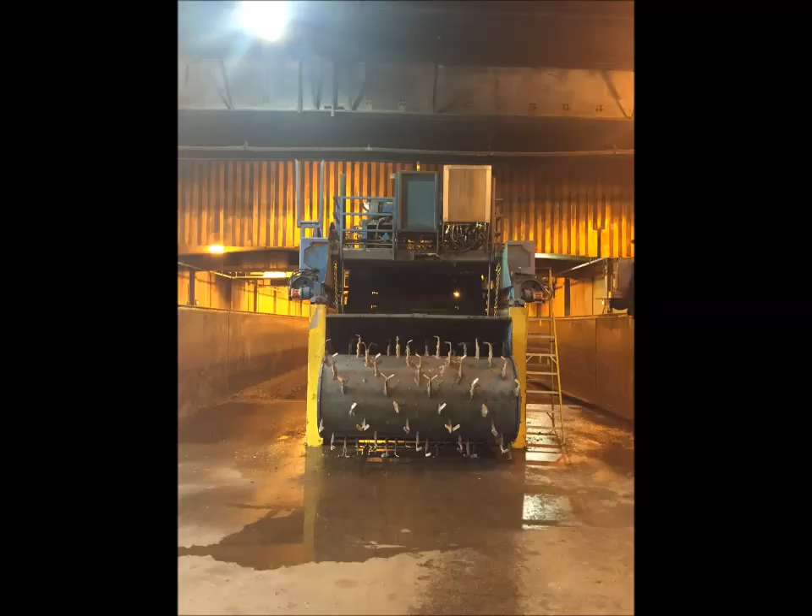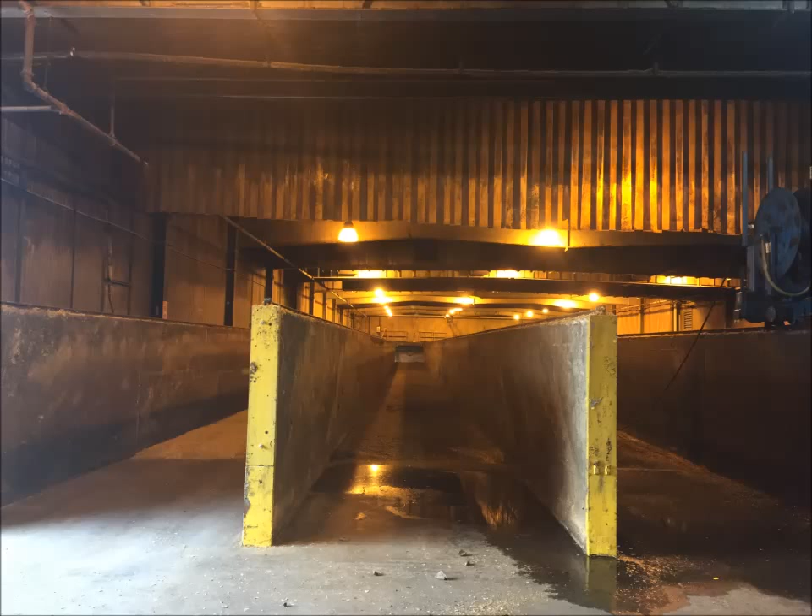Compost is composed of biosolids, wood amendment, and recycled compost, which is used as an inoculant. A normal batch is mixed using a layering method of these three components. The layers are turned and fluffed with a front loader until well mixed. This process is done 3 to 4 times until the bin is full and ready to be turned for the day. After the active composting period, the material looks and feels much like peat moss or leaf litter, but it must be cured for a minimum of 30 days prior to unrestricted sale.

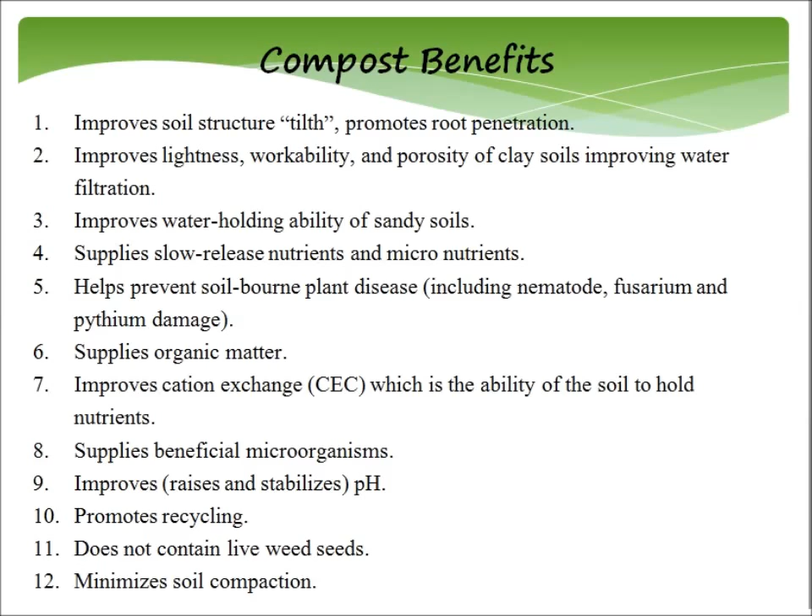Biosolid samples are tested monthly for heavy metals. Additional testing is done for parameters such as pesticides and polychlorinated biphenyls, or PCBs. Copies of the regulations and all biosolids analysis records are available to the public at LAWPCA or on the website at lawpca.org.

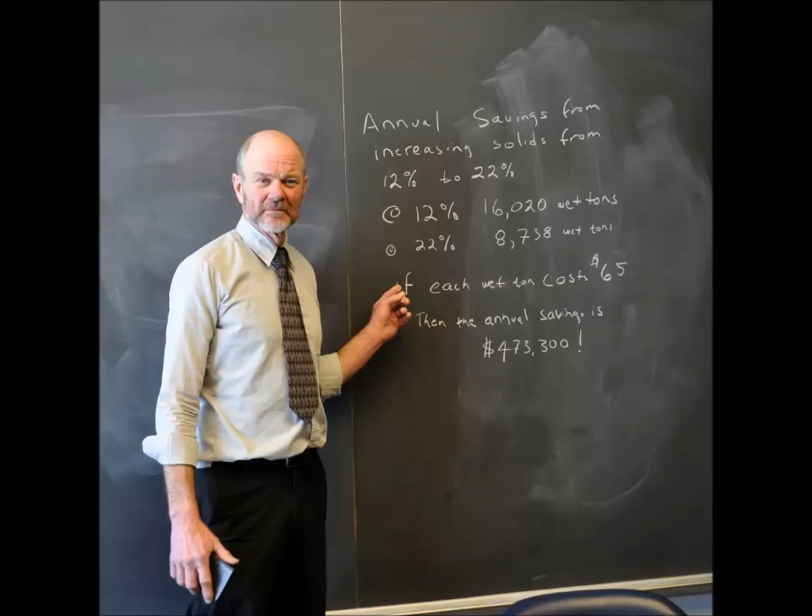LAWPCA employs 18 treatment plant employees and 3 compost facility technicians. The treatment plant is staffed between 6 a.m. and 4 p.m. 7 days a week, 365 days per year. At times when the treatment plant is not staffed, there is always an operator on call who will respond if there is a situation that needs attention. Being a water quality professional is a career that provides good pay and benefits, but also creates a great deal of pride in environmental stewardship.